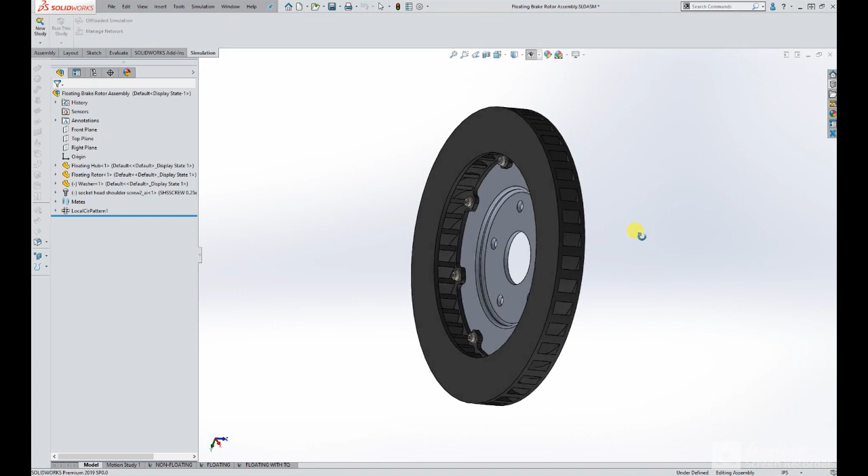I am going to do a thermal analysis of this two-piece floating rotor and compare it to what happens when you have a non-floating rotor.

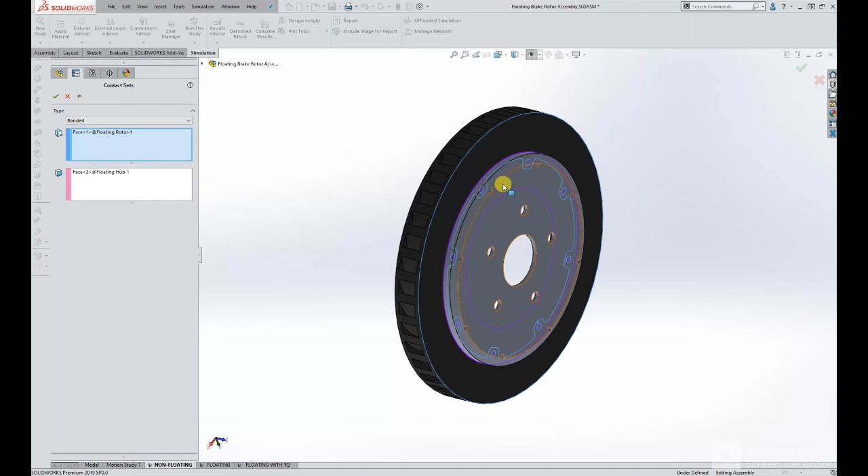To set that up, I've put up a couple simulations here, one for non-floating. To simulate this, I'm essentially just establishing the contact area between the hat and the ring, and making those items bonded. For the floating two-piece rotor, I've essentially just established a set of connectors.

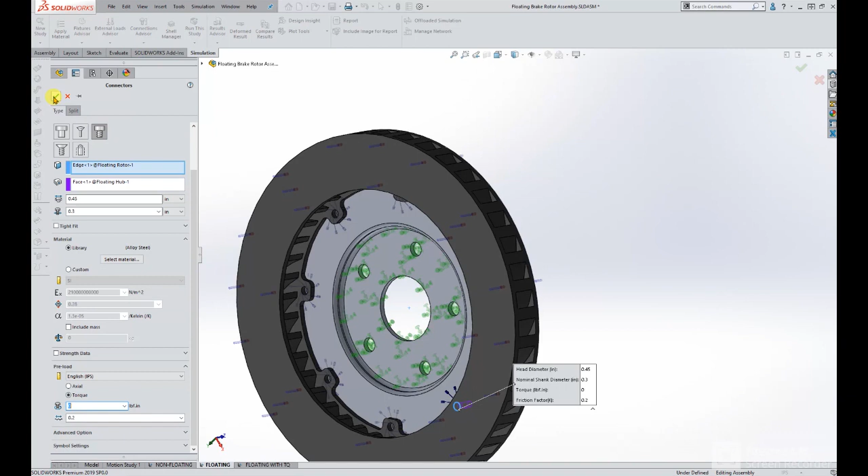You can see here bolts that go around that connect the ring to the top hat. To enable the element to float a little bit, I didn't add any torque or preload to these fasteners, so they're only going to constrain it within the physical constraints of the hole, but not actually provide any preload that a fastener typically would. This would be like a shoulder bolt going through, but not providing a compression force on the rotor itself.

For all of these examples, we'll be heating the rotor face up to 1000 degrees on both the inner and outer face of the ring. That really is the quick overview of what we're going to be doing here.

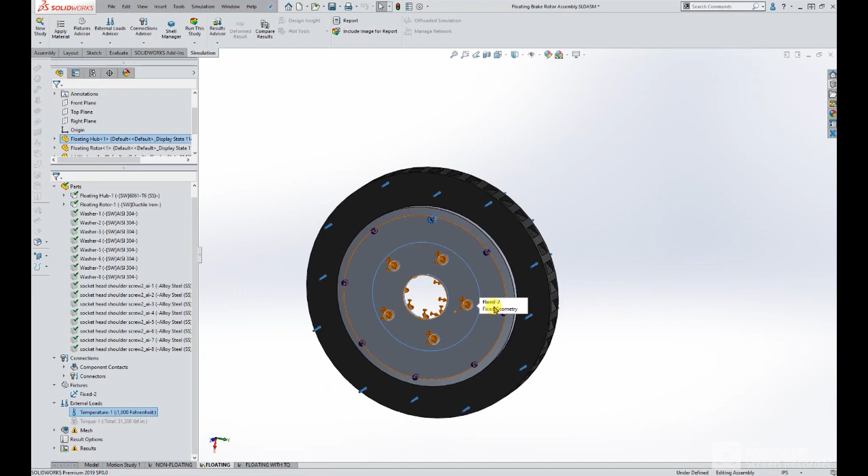For the material types, the top hat is a 6061 aluminum, and I've just done a ductile iron outer ring. I had some other materials in here that I was playing with before, but ultimately I decided to leave them out and just use the fasteners provided within SolidWorks simulations. So let's get started.

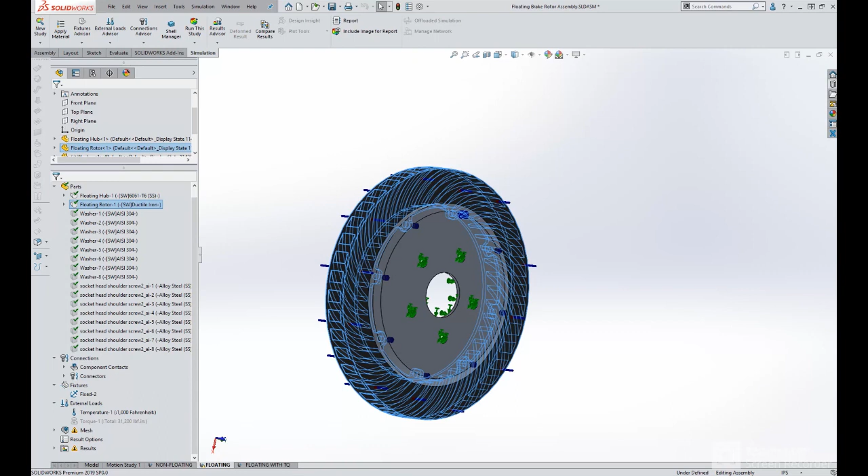First, I'm going to show some animations of the floating and the non-floating unit being displaced in the Z direction. It'll look something like this, and the Z direction is basically the direction of the axle, the shaft here. We're really only looking at that because that's what's going to impact the amount of pressure the pad is putting onto the rotor itself.

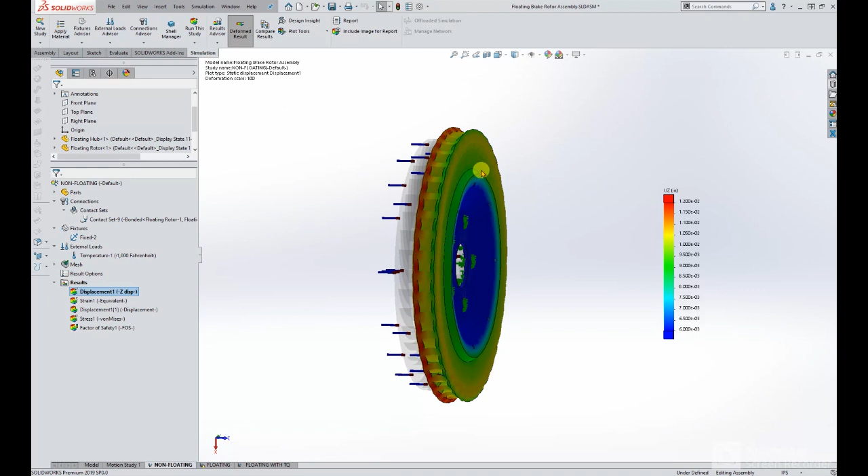I've gone through and looked at the stresses. There's nothing of real concern there, so I'm not even going to get into any of that. We're strictly just going to look at the deformation that is due to the heat. Obviously there's some other loads and stuff that would occur, but we're going to ignore all of that for the moment and take a look at how heat impacts a two-piece rotor.

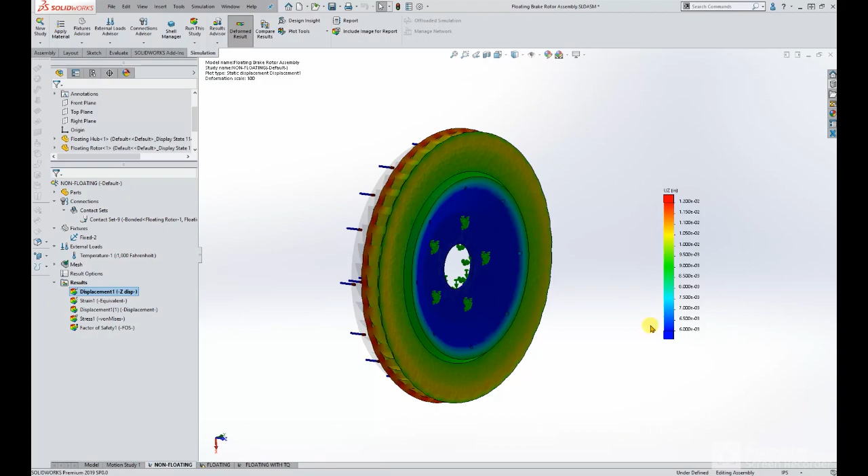Alright, let's start looking at some simulations.

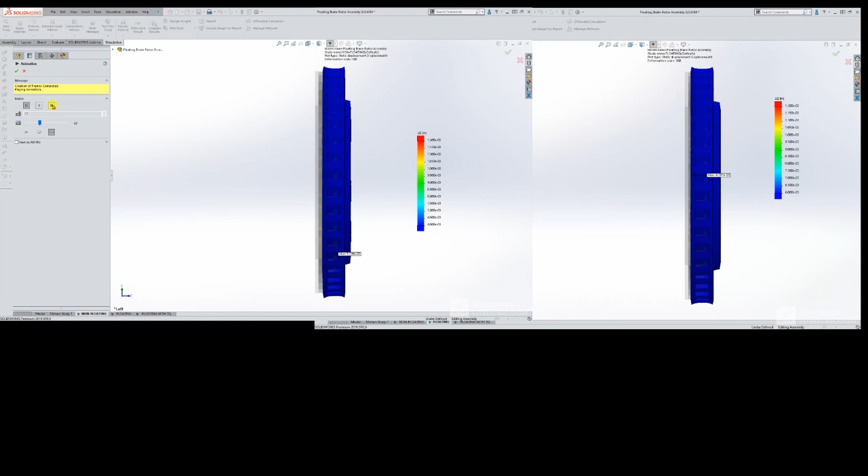So here's the non-floating rotor. Let's take a look at the values of the displacement on the surfaces of the rotor itself. I'm going to select this front face here, and I'm going to select this back face. We're going to hit update. This is going to collect all the points along those two surfaces. What we're really looking at here is our minimum and our maximums.

We can see we have a maximum value about 12 thousandths of an inch with a minimum value of about 4.5 thousandths of an inch.

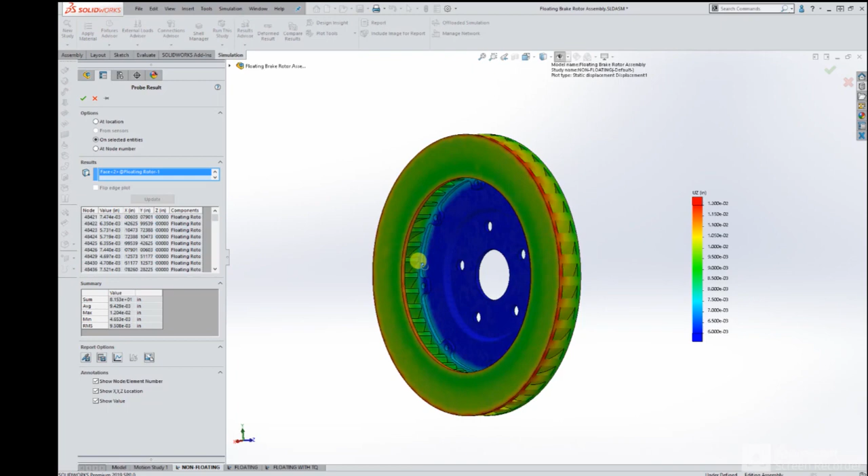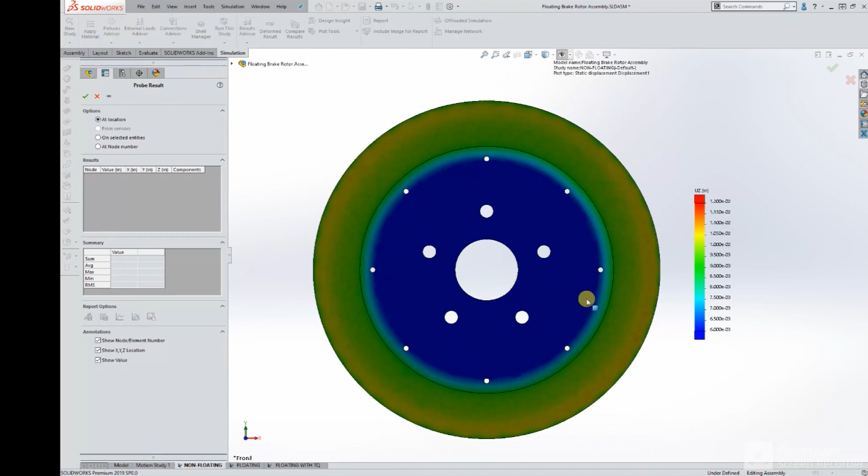Now if we want to go back in, and we'll look at some points just across the surface of the rotor rather than the entire surface itself. We can do at location, come over here, and we will just select a few spots along the surface of the rotor just to give us a bit of an idea.

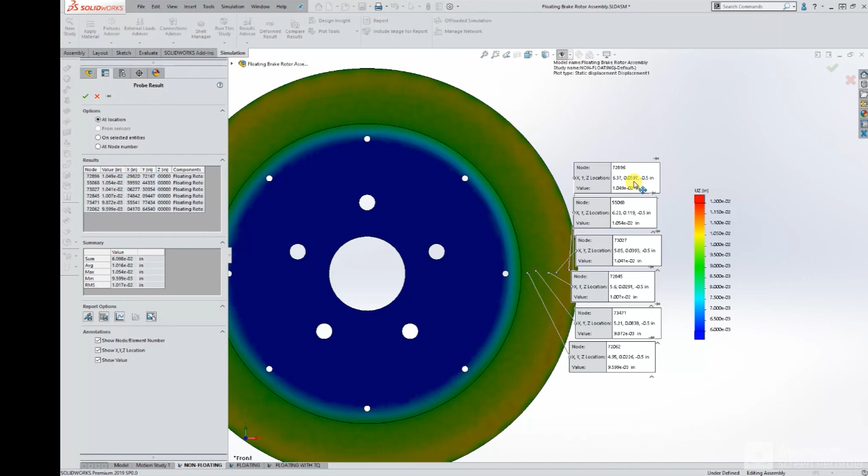A little rearranging here. Again, we can see those values range from about 10.5 thousandths down to about 9.5 thousandths. So we are seeing about a 1 thou delta from the inside to the outside of the rotor, with an overall displacement of around 10 or 11 thousandths of an inch.

Now if we take a look at the floating rotor and we do the same sort of quick analysis, we'll select the front side of the rotor and the back side, and we'll see what kind of values we have. Alright, so our maximum's around 9.5 thousandths with a minimum of around 2.5 thousandths.

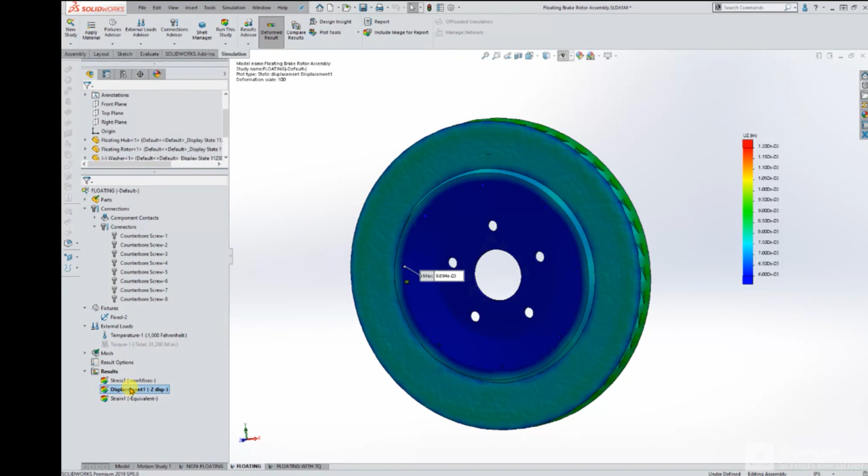So a little bit less overall. And if we, here, I'll have to look at some point values along the front surface here. Do a little rearranging. Oops, just made a mess of it again.

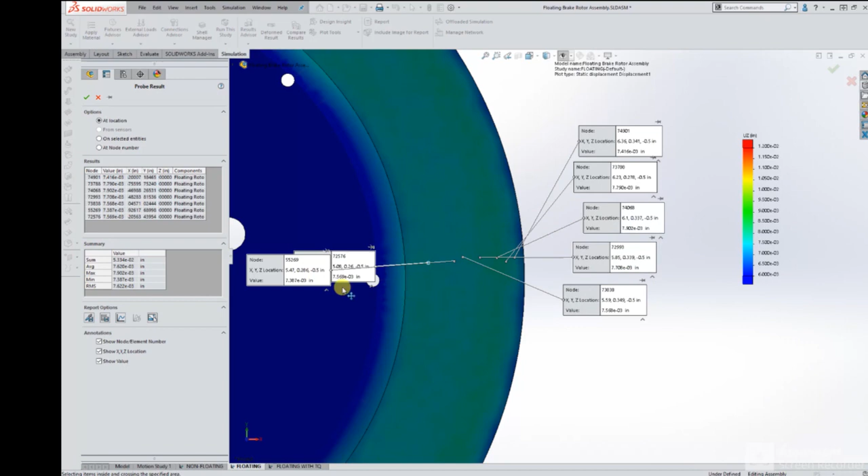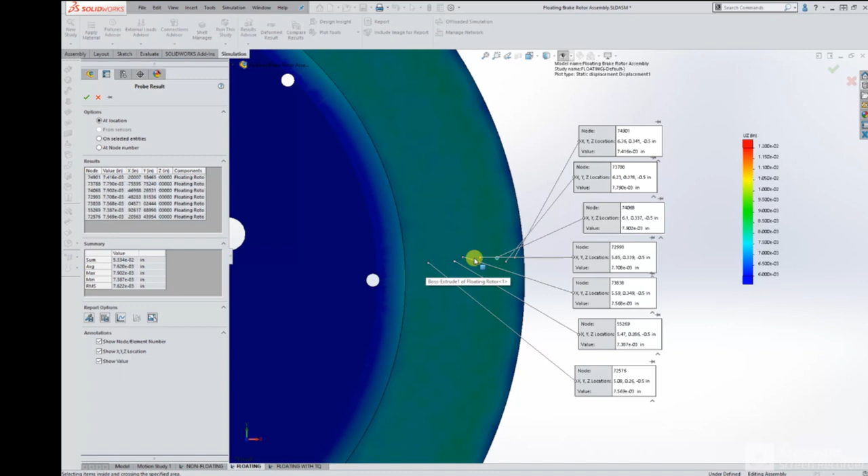So if we look at these values, we can see we have about 8 thou right here and a minimum of 7.4. So this one's a little bit more consistent. We definitely have less than a thou, maybe half a thou of discrepancy and deviation across the front face of the rotor.

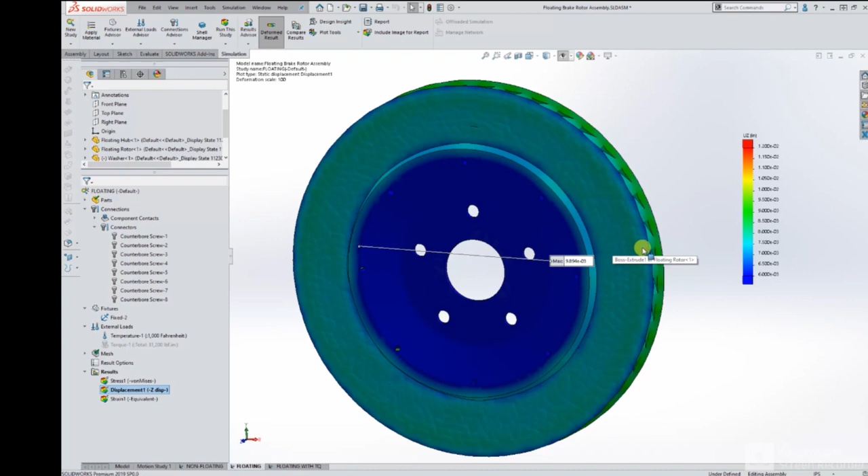So that will definitely show itself in how much pressure is being put on the pad when these get real hot. Obviously the non-floating will present a little bit more pressure on this outer side, and then it'll decrease as it goes inward, and the floating rotor will be a little bit more consistent, applying a similar pressure across the entire face.

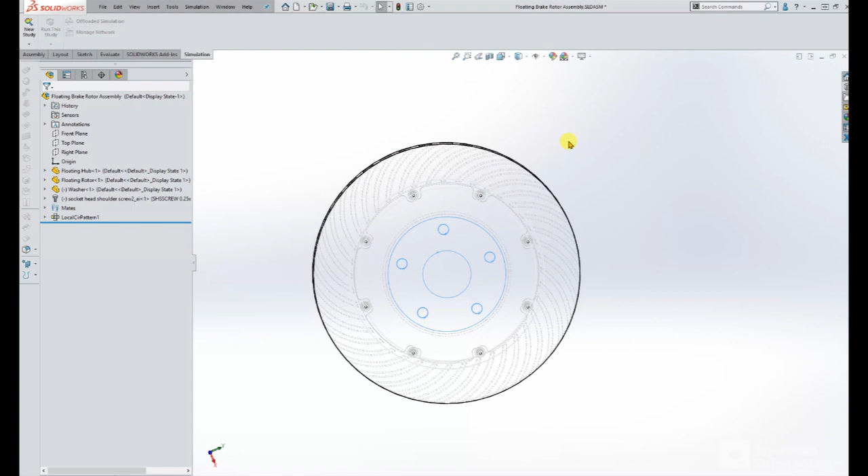I'm going to keep on this brake theme and look at doing some CFD analysis on the rotor. You can see this guy here has actually some curved vanes in it. We'll look at how those work versus a non-curved vane, and hopefully that'll be an interesting thing we can take a look at. So until next time, see ya.